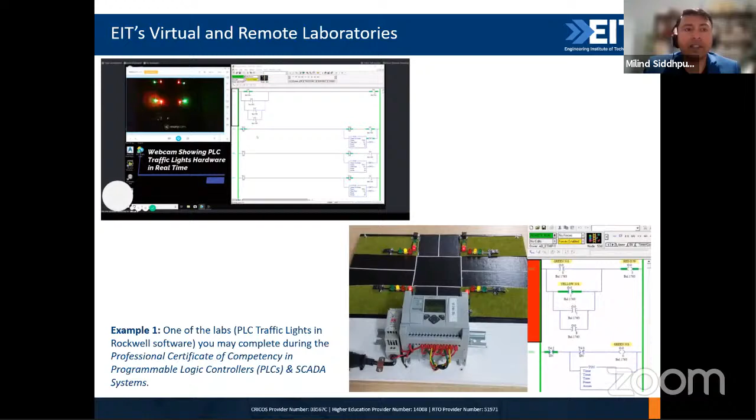This one is an example of a virtual lab where you log onto a remote lab computer and you can do some kind of an experiment, which is mentioned here.

This is an exercise on a 4-pole squirrel cage induction motor, where you can measure phase voltage and neutral current, connecting all the cables virtually in this lab. The best part is that if you connect cables wrongly on real equipment, it might cause fire, short circuit, or electrocution. That's not a danger here. If you connect the cables incorrectly, you just get an alert saying that's not correct, and asking you to reconfigure your connections. So you can learn a lot by doing this kind of virtual lab.

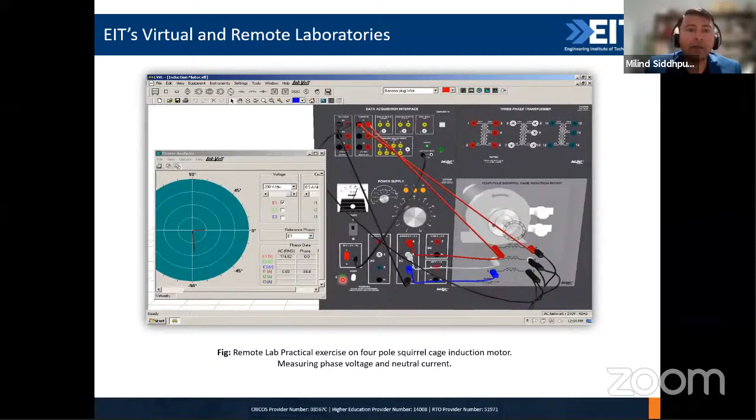The next one is more about project management. If you do a project management professional cert, you'd be dealing with work breakdown structures, and there is WBS Pro available for that. Some software is quite expensive, and we don't want our students to buy it, so we give them full access to our remote and virtual laboratory so they can run the software and do all sorts of practical work without buying any licenses. With WBS Pro you can generate work breakdown structures, and also use PlanBee to create your PERT or Gantt chart, which is required in your project management exercises.

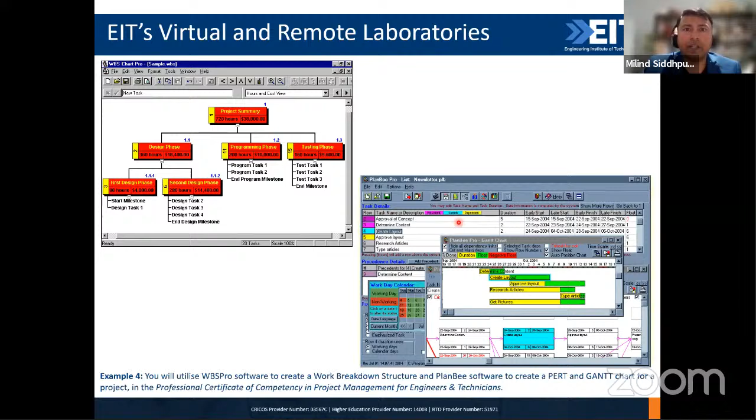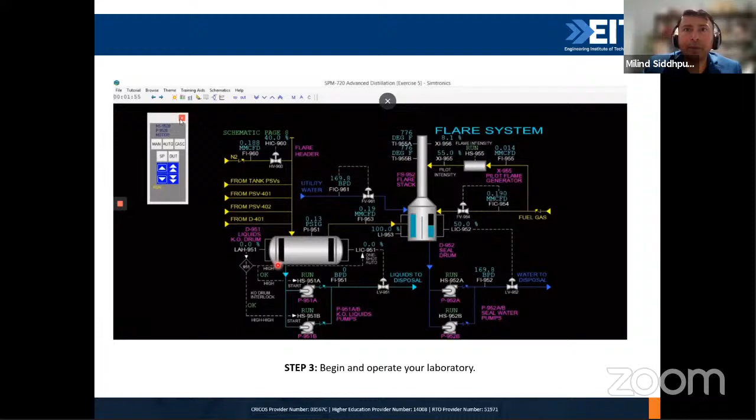For example, if you are doing some kind of power plant or process plant simulation, you can choose a particular power plant system with a number of reactors, boilers, and distillation columns—some kind of process plant simulation. You can set the parameters, and once you've fixed your parameters and your process plant for your particular course, the next step is to go into the virtual field operator mode.

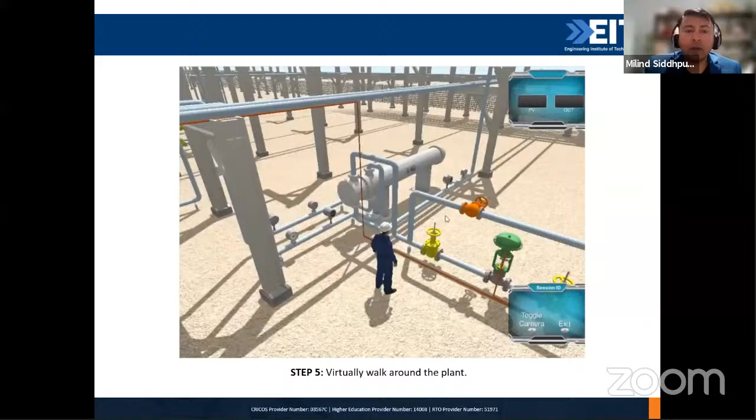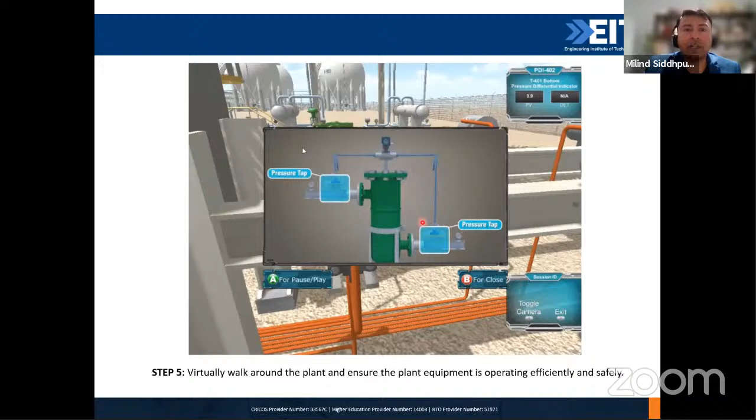It's more like a gaming experience, where you can enter multiplayer or single player mode, and a couple of colleagues or students studying together can log in together. Then you can walk through the plant you selected earlier. For the distillation column process plant I showed you earlier, your avatar literally goes into the process plant. You can walk around, move around, and look at different units—the pressure and temperature settings you configured. If you go next to a particular unit, you can look into its working, read the pressure and temperature readings, and write them in your lab report. So that's the very real-like experience you get in our remote and virtual lab.

Next, I'm going to show you a virtual experiment for the course Professional Certificate in Hydraulics and Pneumatics. This course is delivered by very enthusiastic lecturers who have a lot of industry experience as well. FluidSim is the software we use to run this particular virtual lab for hydraulics and pneumatics. So I'm going to show you how we enter into the Electromeet remote lab and how we actually do the lab. Hang on for a sec, I'll be switching my windows.

So we are going into the remote lab, obviously as a student right now, because it has some access limitation. That's all right. There's a variety of some very expensive software or simulation labs. I'm going to go into hydraulics, FluidSim hydraulics, and let me just make it bigger.

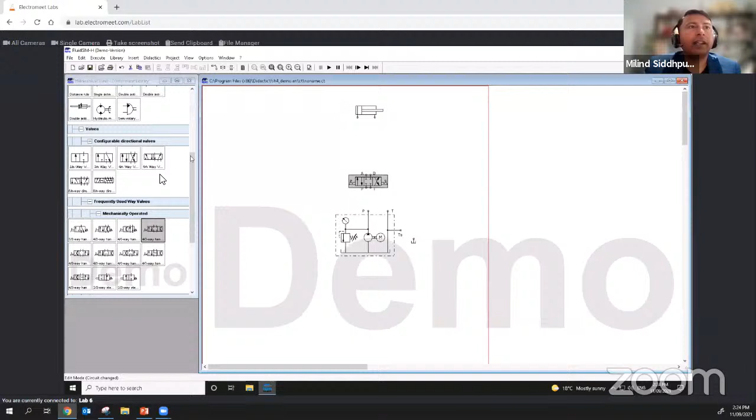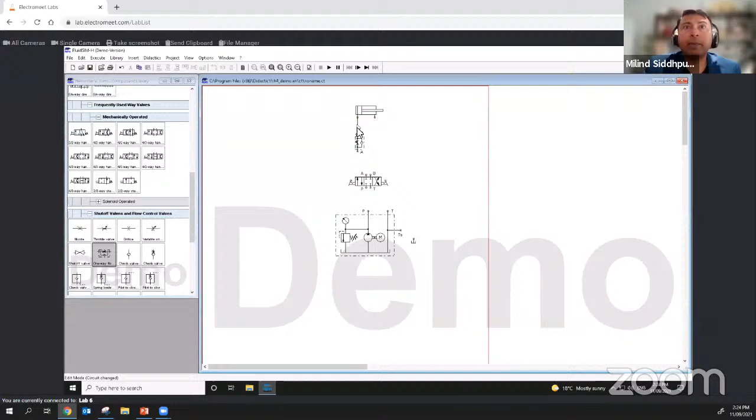Let me select one more valve, which is here, which I will be rotating. Because our students actually design these hydraulic circuits and learn how to design them, they can then practice how to virtually connect and build such circuits in this software and virtual environment, and get a proper grasp of the topic.

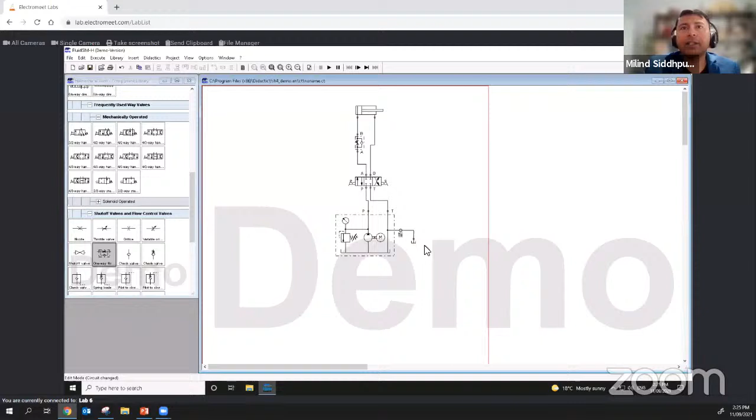So let me connect all of these connections. Because I'm sharing this, it sometimes just flickers a little bit - usually our students are sharing with other people. So the hydraulic circuit has been connected. Let me zoom in a bit so that you can see what's going on here. I hope you can see that.

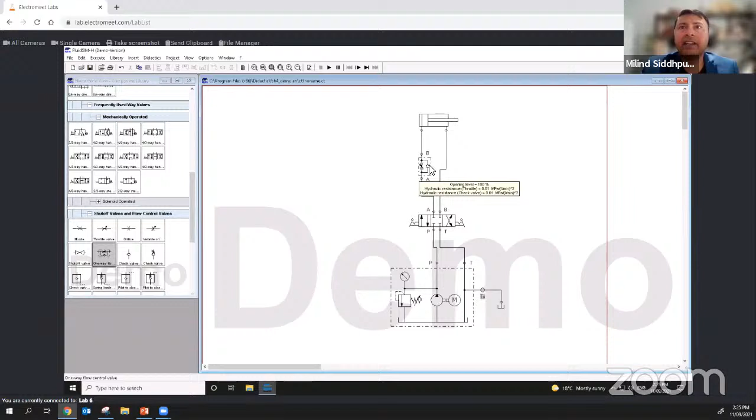Now I can execute that particular hydraulic circuit. What I have done here is there is a pump unit, tank, and pump unit with electric motor. There is a direction control valve which can move this hydraulic cylinder, a double acting hydraulic cylinder, in forward or reverse direction. Then there is a flow control valve which can control the amount of flow. So if you designed your hydraulic cylinder with your mechanical engineering calculations using Pascal's law or Bernoulli's theorem, you can now prove that the design circuit actually works by virtually simulating the actual circuit.

So I'll be running it now. Starting it, you can see the pump is already producing oil, and pressurized oil is waiting near the direction control valve. You only need to click this one so that this piston goes from left to right. I'm doing it now - you can see the piston moved left to right and the pressurized oil went through the circuit.

Then in return, I just need to press the other lever so that it goes back. The piston actually retracted - you can see this red line, which means pressurized oil was diverted to the other side. We can also change how much oil goes into our hydraulic cylinder. This is the setting for that - you are controlling the flow going inside the hydraulic cylinder.

After reducing the flow, you would see that the piston would move very slowly now. Sorry for that again, it just flickers.

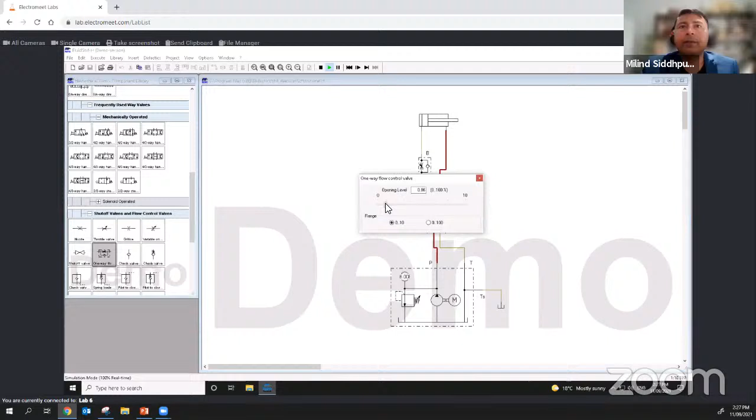Now you can see it goes a little faster because I think the control hasn't been executed properly. I have to do this slightly lower, and now I have to click that again. You can see it's going very slowly - piston is going left to right very slowly because the flow rate of oil going in has been lowered in the flow control valve. In the retraction, if I click this one, it would go faster, and then again slower if I go left to right - very, very slow.

This is one of the virtual labs where students not only learn the concept, they also trial those concepts in building actual circuits and actual lab apparatus in some way.

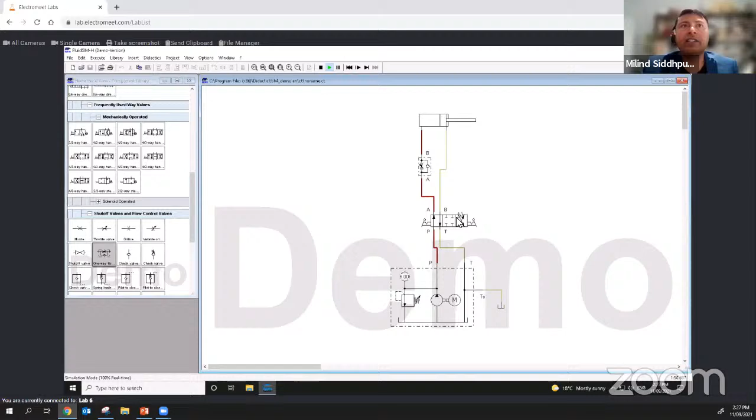And if they have any questions, the industry experts also help them. They guide them how to operate certain lab rigs and virtual software and virtual labs, so they can grasp everything about the topic.

So even in the 3-month short topic, we have it in the bachelor's and master's degree courses also. We have these kind of laboratories built into your course, which gives you the real physical aspect of the laboratory, which is a must in engineering courses.

So I'm going to share my slides again, and I hope you can see it. That was my demonstration about FluidSim software, which is a virtual lab in the professional certificate in hydraulics and pneumatics. This particular course is actually starting this Monday, so that's why it's not under the list of upcoming courses, since enrollment has closed, but you can still try your luck if you like to go with hydraulics and pneumatics professional cert.